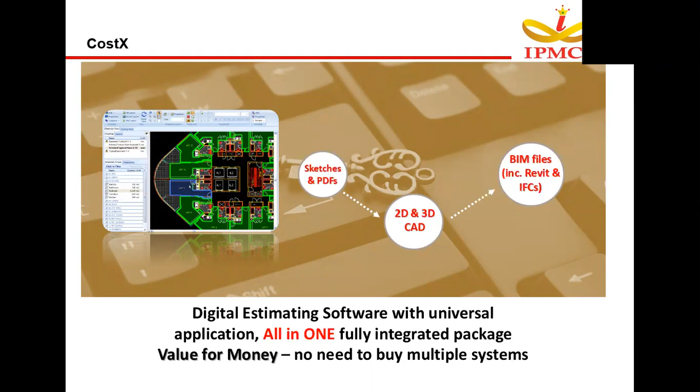In case of 3D or BIM model, CostX supports Revit models, ArchiCAD, Tekla, MicroStation, SketchUp, and Navisworks models. So extensions such as IFC and DWF are supported in CostX. Key features of CostX are 2D measurement, BIM takeoff, auto revisioning, estimating workbooks, and report writer.

The topic is about footing rebar takeoff. Say I have a footing schedule instead of typical sectional details for each and every footing. So when I have a schedule for footing F1, which is 1200 by 1500 by 500, and bottom in x-axis and y-axis, I have 16 mm diameter of bars with different spacing such as 150 and 100 mm.

And at the top, I have x-axis and y-axis both having 10 mm diameter running throughout, and again spacing is 150 mm and 100 mm. So with this schedule, I'll be calculating the number of bars first.

So to calculate the number of bars in the x-axis direction, the formula I'll be applying is y-axis length divided by spacing of x-axis bar. The same way, number of bars in y-axis direction equals x-axis length divided by spacing of y-axis bar.

So if we apply that formula, from the schedule we can find out bottom or top bars in x-axis direction equal to round of 1.5 divided by 0.15. So 1.5 is the y-axis length divided by 0.15, the spacing. The same way, bottom or top bars in y-axis direction is equal to round of 1.2 by 0.1. So 1.2 is the length of the footing in x direction divided by 100 mm spacing.

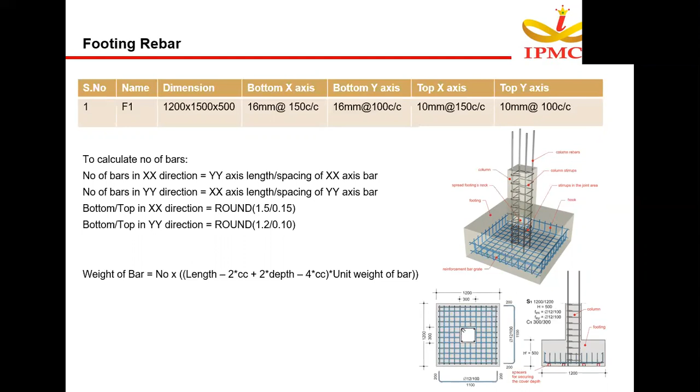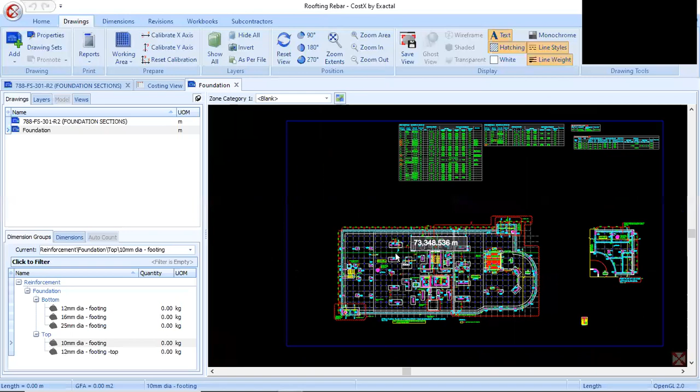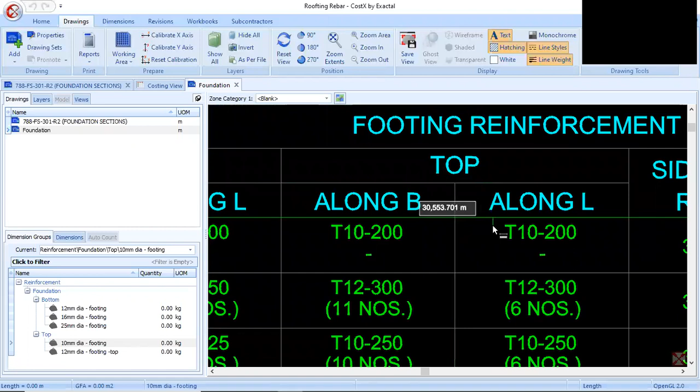So this is my foundation drawing, my top view, plan view of my foundations, and this is my schedule of foundation. So I have length, width, and depth of the foundation. The same way, along breadth and length, I have the bottom diameter and its spacing. The same way, along breadth and length, at the top, what is the diameter of bar and what is the spacing between them. When I go to foundation section, I'll get to know how my bars are being placed.

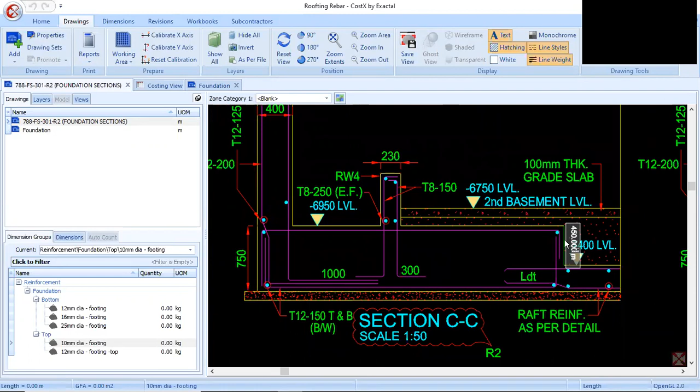If you see the bottom bar, it is total length minus clear cover two sides plus depth minus 2 times clear cover. The same way for top bar, as top bar is stopped at 300 mm level in the depth direction, I have applied the formula in that way. So now let us see

in the foundation schedule for first foundation F1, where I have bottom bars 25 mm diameter at 200 mm center to center, and top 10 mm diameter at 200 mm center to center. So as per this schedule, and according to the sectional view of the foundation, I have created the dimension group. Say reinforcement is my folder, foundation is another subfolder. Under that, I created one more subfolder as bottom and top.

So in the bottom, I have 25 mm diameter bar. So I have created a bar dimension group as 25 mm diameter, and measurement type as length, default display as weight, default height of the footing as 450 mm as its height is 450 mm, and unit of measurement as kg.

In measure dimensions, to calculate the weight of the bar, I included a formula. What we saw in the presentation is length minus 2 times clear cover of 50 mm plus 2 times height minus 4 times clear cover, multiplied by unit weight of the bar. So unit weight for 25 mm bar is 3.85 kg per running meter. So that is what I have applied here. So this is for bottom bar of 25 mm.

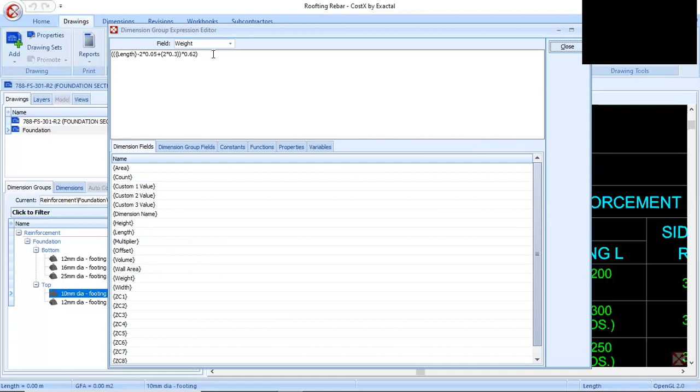bar is being bent into the footing at a depth of 300 mm for the top bar. So that's why here I have taken the bent up bar length as 2 into 0.3, two sides, multiplied by unit weight, which is 0.62 for 10 mm diameter bar. So now to calculate this 25 mm diameter from my footing schedule, I have created this dimension group with formulas. It is for F1.

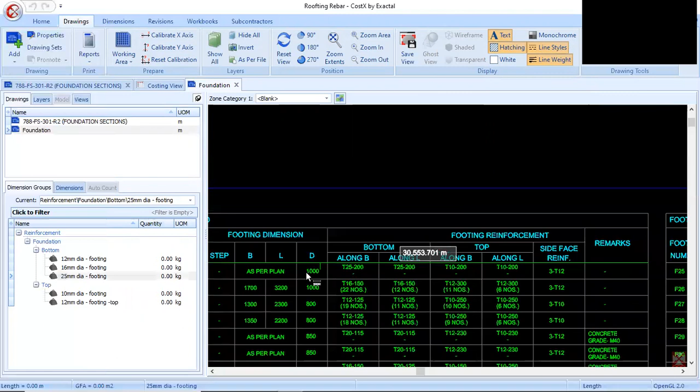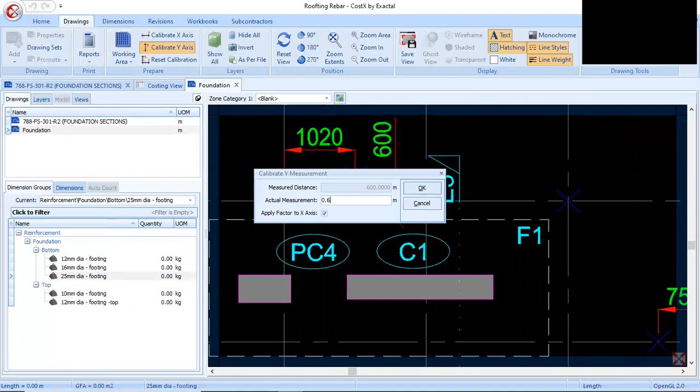This is for F1. So I'll go to the plan view of the footing. Here is my F1 footing. So before going to take quantities, I'll just measure the distance, whether my drawing is in scale or not. So it is 600 meters. So I'll calibrate it to 0.6. Now the entire drawing is calibrated. So here F1 footing.

So I need to calculate bottom y-axis bar and x-axis bar. I'll go to dimensions. I'll click on this rebar option. First, I'm going to calculate the x-axis bar weight. So first, I'll select the y-axis length. So y-axis length divided by 200 mm spacing from the schedule gives me the number of bars. Next, I'll click on the x-axis length. So this length minus cover multiplied by unit weight will give me the total weight of the bar in the x-axis direction. I'll click here.

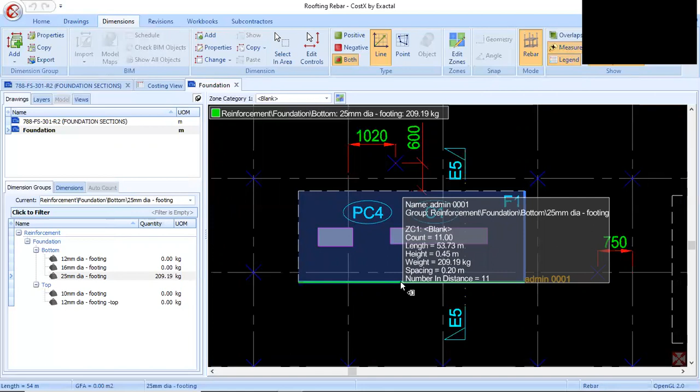Then I'll press enter. So spacing for this bar is 0.2 meters, which is 200 mm. Automatically, it calculates 11 number of bars in x-axis, giving update. So now total weight of the bar is 209.19 kg, only in the x-axis direction. The same way, I have to calculate in the y-axis. Again, I'll click on the x-axis length. So now x-axis length divided by 200 gives me the exact number of bars.

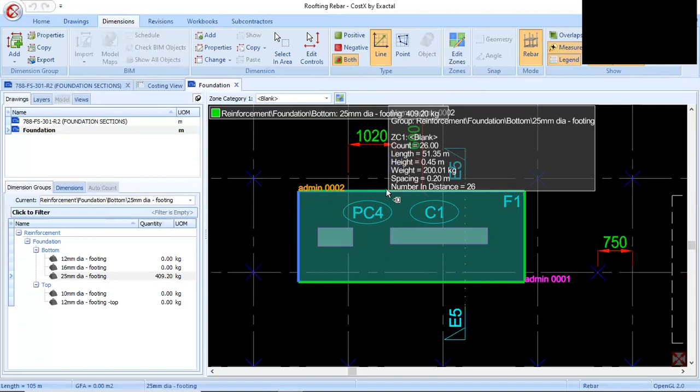Then I'm clicking on the y-axis bar, y-axis length. So now the y-axis length minus clear cover gives me the length of the bar in y-axis direction. I'm giving enter, and 0.2 meter is the spacing. The total number of bars is 26. Update. So in the y-axis direction, I'm having 200 kg with numbers 26. Total weight for F1 for bottom bar is 409 kg.

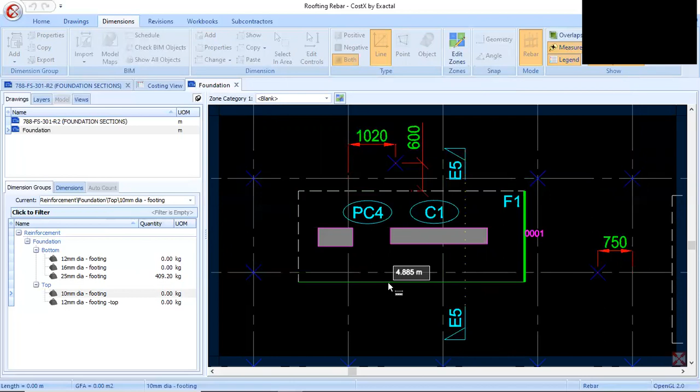Next, I have to calculate for 10 mm dia footing, which is at the top x and y axis. The same way, I'll click on the rebar option. First, I'll select the y axis length. So y axis divided by 100 mm was the spacing. X axis length. This length minus 2 times clear cover plus 2 into 0.3. That is the formula I have applied for calculating the total length of bar. Enter. 100 was the spacing. The total number of bars are 21.

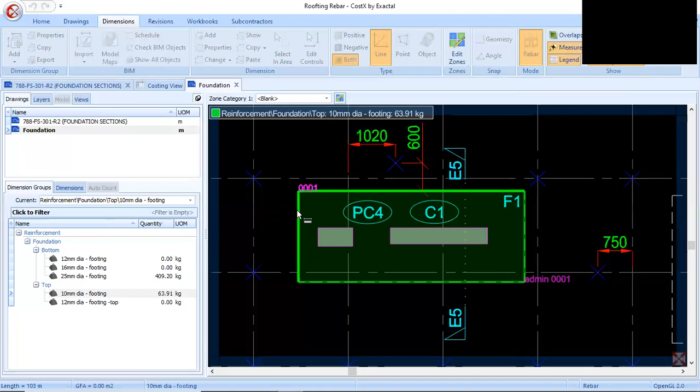The same way, to calculate the y-axis bar, I'll click on the x-axis length, y-axis bar length, 100 mm is the spacing, which is 0.1 meters. So number is 50 and give update. So now 125 kg is the top bar weight, which is 10 mm diameter at 100 mm center to center spacing. The same way, I'll go to the footing schedule F2.

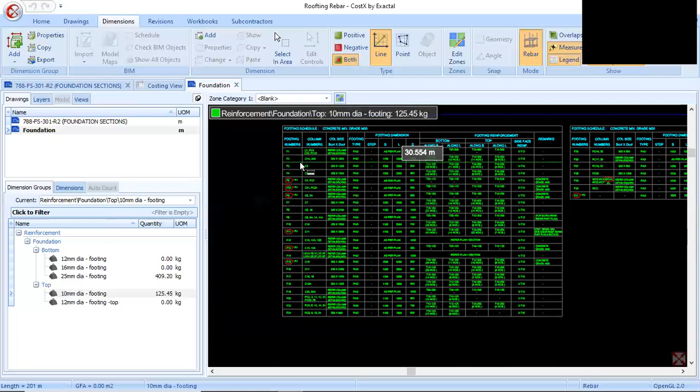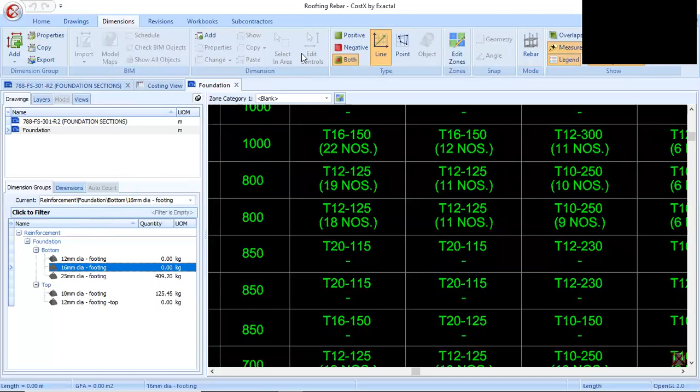Here I have 16 mm diameter, 150 mm center to center, and 12 mm at 300 mm center to center. The same way, I have created for bottom 16 mm diameter and top 12 mm diameter. So 16 mm, again, the formulas will be same. Only thing is, I have changed the unit weight of the bar for 16 mm diameter. The same way, for 12 mm diameter at the top, formula remains the same. I have updated with the 12 mm diameter's unit weight.

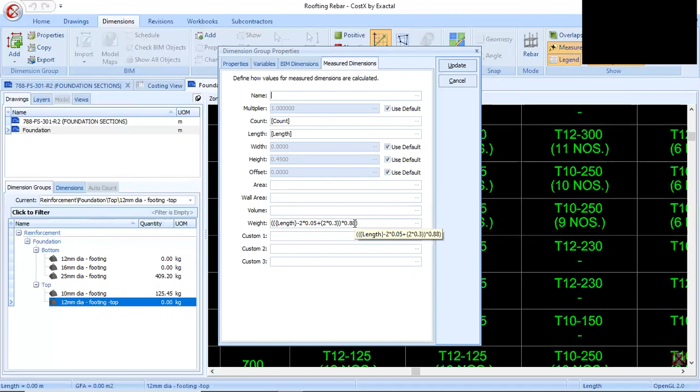So now I'll go to F2. So this is my F2. First, I'll select 16 mm diameter, which is at 150 mm center to center spacing. To calculate bottom bar in x-axis and y-axis direction, first I'll click on the y-axis length divided by 150. Rebar option, y-axis length divided by 150 gives the number of bars. Then x-axis length minus 2 times clear cover will give my length. Spacing is 0.15 meter. Numbers will be 23.

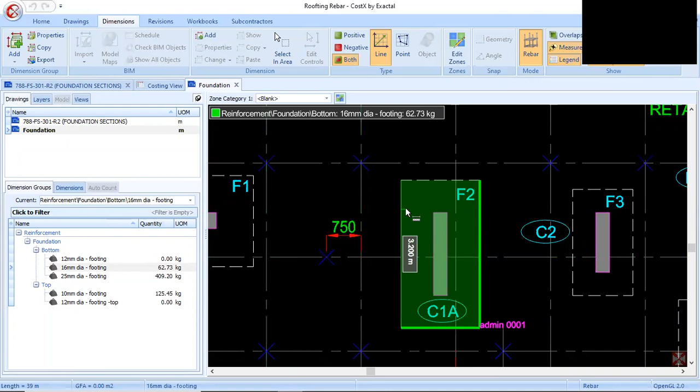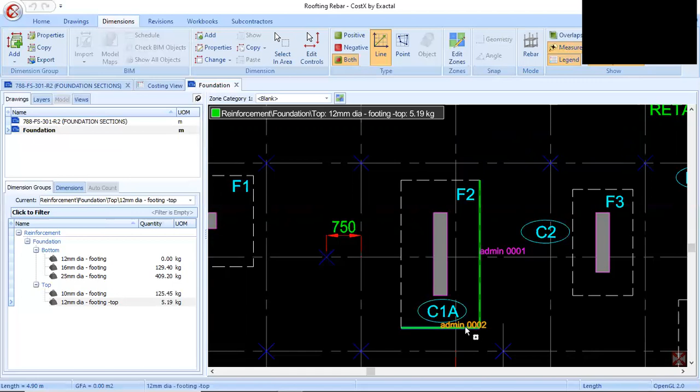Same way update. For another direction, I'll click on the x-axis length divided by 150 gives me the number. Y-axis length for length of the bar, 0.15. Same way for top, I have 12 mm diameter at top. So I'll click on the y-axis length and then x-axis length of bar. Y-axis length, x-axis length of bar, 0.150 m, 1 meter. In another axis,

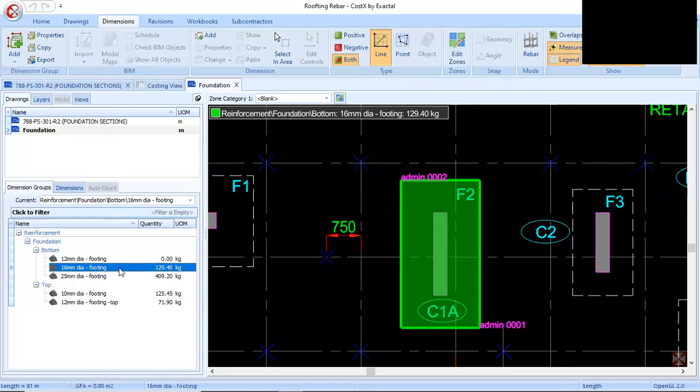so now total weight for F2 at the top is 71 kg, 72 kg approximately, and 16 mm diameter at bottom is 129.40 kg. So this way, if we don't have the exact footing reinforcement detail in the drawing, we can also calculate the quantity for steel from the reinforcement schedule by creating the formulas which are predefined one time. Then we can do accurate quantity takeoff.